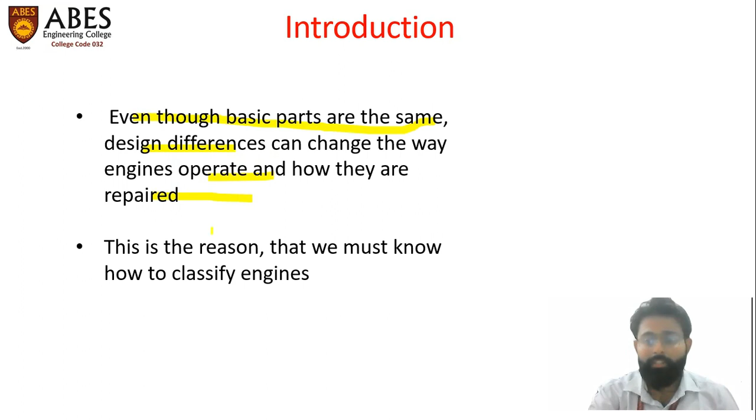So on what basis are internal combustion engines classified? Even though the basic parts are the same, design differences can change the way the engine operates and how it is repaired. So this is the major point: all the basic parts of the engine are generally the same, but the design differences between them can change how the engine operates and how it is repaired and maintained. This is one major basis of consideration by which we can classify the internal combustion engine, and the reason we must know how to classify internal combustion engines.

So based on these factors, there are certain categories such as, first of all, cylinder arrangement, then number of cylinders, the cooling system type, the valve location, where the valves are located, and where the camshaft is located. So these are the 5 categories on which we can classify the internal combustion engines.

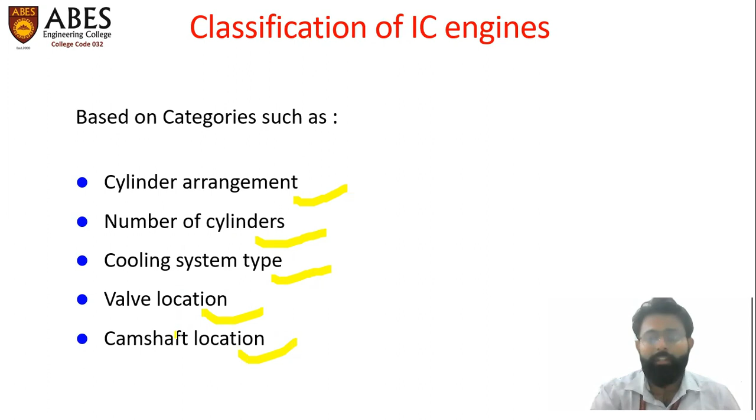Other than these 5, there are 6 others too: based on the combustion chamber design, the type of fuel which is burned in it, the type of ignition, the number of strokes per cycle, the number of valves per cylinder, and the type of aspiration. These are the bases for classifying the internal combustion engines.

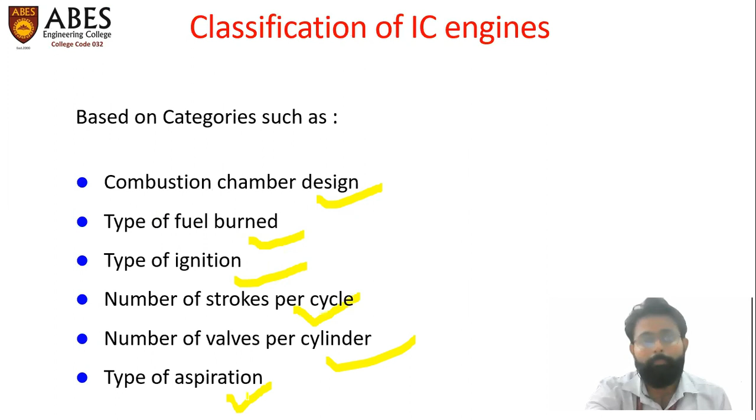So let's pick up the first category, cylinder arrangement. Cylinder arrangement as a category refers to the position of the cylinders or cylinder blocks in relation to the crankshaft. I'll be depicting it with a pictorial depiction or a moving animation.

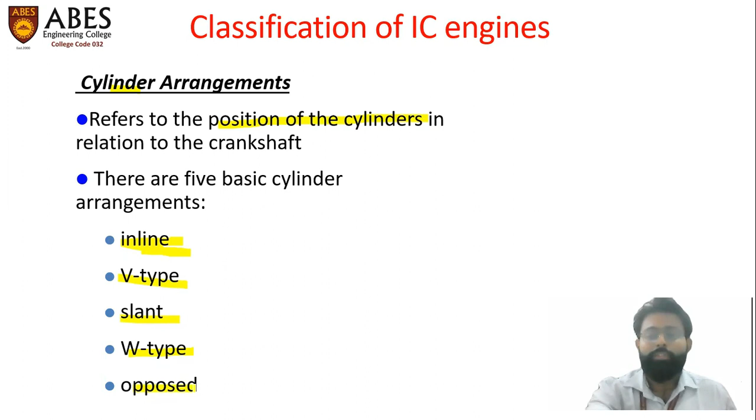So on the basis of position, there are 5 basic cylinder arrangements. First is the inline arrangement. Second is the V-type arrangement. Third is the slant arrangement. Fourth is the W-type arrangement. And fifth is the opposed cylinder arrangement. So we can apply these cylinder arrangements based on the position of the cylinder.

Here you can see all these pictures are depicting either 4, 6 or 8 cylinder engines, so the number of cylinders is also varying. In the inline cylinder arrangement, there are 4 cavities or 4 cylindrical holes in which the pistons are placed. These are in series, inline, so all the cylinders are positioned in relation to the crankshaft in a single line.

This can also be shown by this animation. So this is an inline engine. All these pistons reciprocating within the cylinder block and the 4 cylinder liners are connected to one shaft, and the angle of connection is 180 degrees. So all cylinders are in one line, and they are connected with the crankshaft in one single sequence.

Whereas a V engine has the cylinder arrangement at an angle of 120 degrees among them. This is a V6 engine animated depiction. 3 cylinders are arranged on the left hand side of the V, and 3 cylinders on the right hand side. You can observe three cylinders reciprocating on one side of the V, and the other three on the other side of the V.

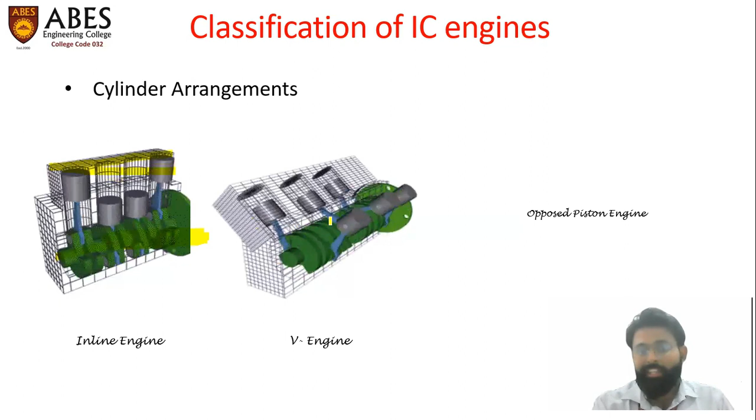Both sets of three cylinders make an angle of almost 120 degrees, and they are arranged on a single crankshaft. So the position of the cylinder with respect to the crankshaft is inclined, and this inclination angle of 120 degrees makes the V engine.

Another type of cylinder arrangement is the opposed piston engine. In this, the cylinders are at an angle of 180 degrees to each other. This is the opposed four-cylinder engine, in which two cylinders are placed on one side of the block and the other two are placed on the other side, making an angle of completely 180 degrees.

So this is a type of horizontal engine. The position of the cylinders is horizontal, and half of the cylinder and piston arrangement is done in the opposed direction.

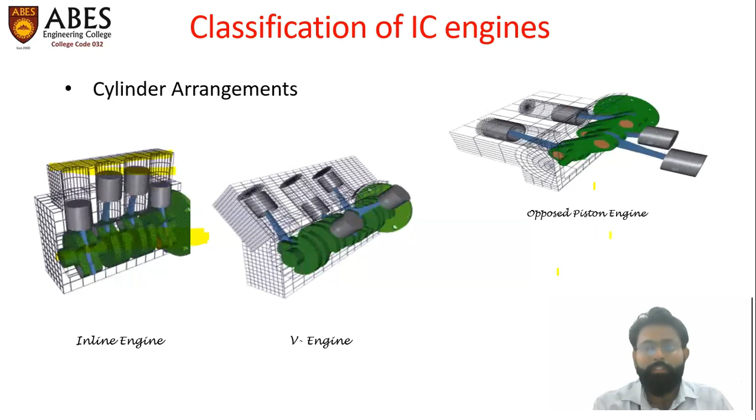Okay, so this is inline arrangement, this is V arrangement, this is opposed piston. So by that we can classify that yes, this is an inline arrangement. V type, you can say the yellow part which I'm highlighting. This is the point of a crankshaft where the axis of the crankshaft lies, and the axis of the reciprocation of the pistons is depicted by these lines.

You can see the shape here, the reciprocation of the piston, the point where the crankshaft is there, and the reciprocating part and connecting rod of the other piston part is making a V. In a similar way, this V engine is also sometimes replaced by the W engines where the number of cylinders increases. So here you can see this is actually a W engine,

W type. So here on a single crankshaft, the piston and cylinder arrangement has 4 different positions, and these 4 positions are in a W pattern. So this happens because we need to adjust the space within the same bonnet of the vehicle or a car, and we have space limitations and considerations.

That's why we need to arrange the cylinder positions, because we need to arrange all the connecting rods on one crankshaft so that we can have the power from all the cylinders combined on a single crankshaft to attain the power on the flywheel and then further to the wheels. This was the opposed, which I have already shown in the animated video. And one is the slant type.

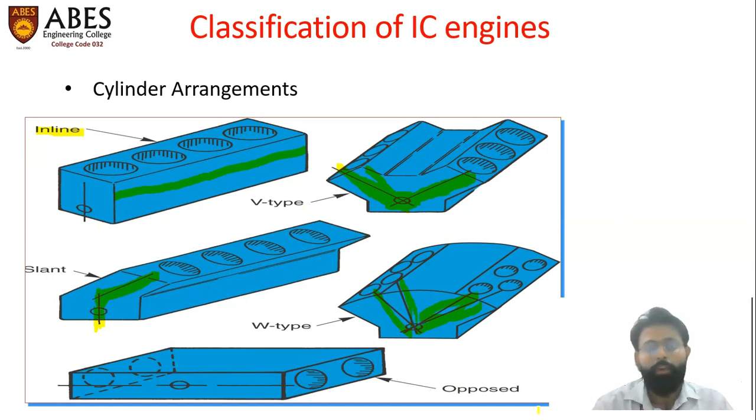After that, we can classify these engines on other categories as well. This was the positioning or cylinder arrangements. Then based on the types of fuel which is used in an engine. So you might have heard saying that this is a petrol car, this is a diesel car, this is a CNG car. So these classifications of the engines or the cars have been based on the type of fuel. They are classified as petrol engine, diesel engine, gaseous engine, or CNG engine, just like that.

And another category is the bi-fuel engine. That means a single engine which can use 2 fuels in it. For example, ethanol and petrol and CNG. All these types of fuel can be used in only one single engine, that is a spark ignition engine or a petrol engine. So a petrol engine can use CNG as well as ethanol in it. Okay, so that's why the bi-fuel category or classification is there.

Then the third category is based on the nature of thermodynamic cycle. Now, what is the thermodynamic cycle? It's our air standard cycle. I was also mentioning in our first introductory lecture that we'll be covering the air standard cycle in the later series. So based on the thermodynamic cycle, we have the Otto cycle. As a first type, Nicolaus Otto made a petrol engine working on the Otto thermodynamic cycle.

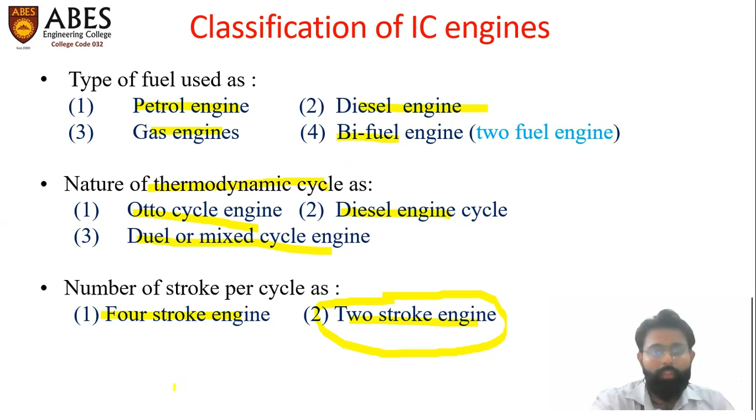In submarines, sometimes two-stroke engines are used because they have certain advantages over the four-stroke engine. But for commercial applications, the vehicles which you see on the road, most of the engines are four-stroke engines. And four-stroke engines have pretty good advantages over two-stroke engines. The differentiation between the four-stroke and two-stroke engine, between a petrol engine and a diesel engine, we will be covering in the later videos. This time we are focusing on just the classification part.

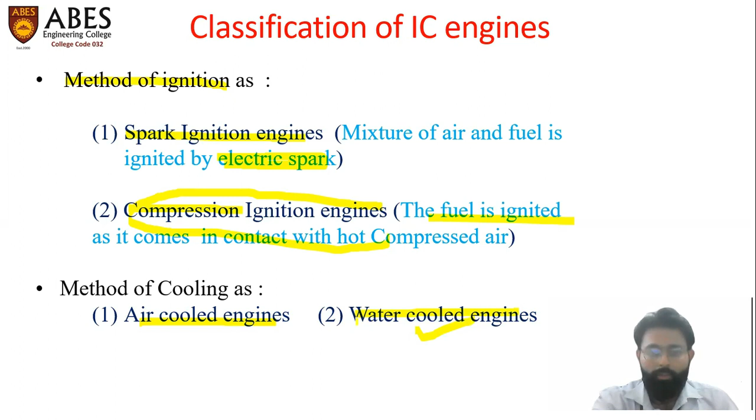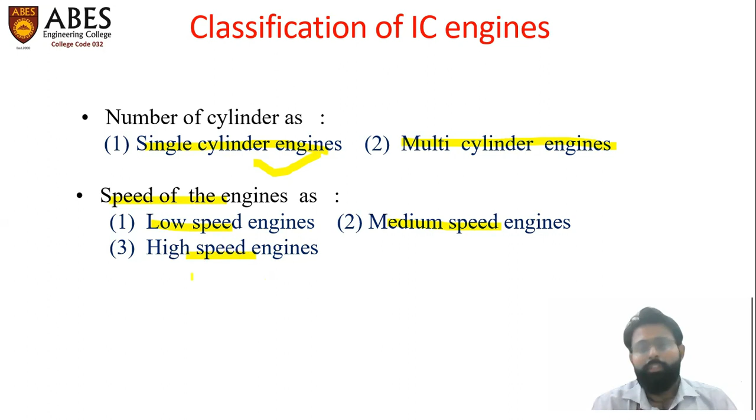Okay. Another classification comes on the basis of speed, how much speed your engine can deliver. So there are low speed engines, medium speed engines, and high speed engines. Generally conventional two-wheelers are considered low speed engines. Many two-wheelers which are sports bikes are considered high speed engines. So it's a power to weight ratio game which has to be analyzed. But based on speed, we can classify that this engine is a low speed engine, and the other is a high speed engine. So these are the categories by which we can classify internal combustion engines.